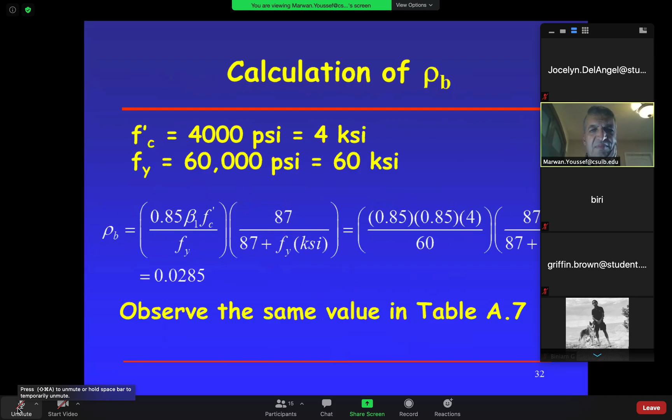We covered all that, and we just had two examples to finish so we can wrap up this chapter. So we did all these: 3.1 we did, 3.2 we did, so we're gonna do 3.3. Before I begin, any questions from last night's lecture? Any comments? All right.

So we're gonna do 3.3. It says determine the ACI design flexural strength, meaning the moment capacity of the beam. Exactly the same as 3.1, 3.2, but of course a different beam with different rebars.

So he's asking us to find the flexural strength. When it says design, that means MU or phi MN, same thing, the ultimate. So there's our section: B is 12, D is 15, H is 18, AS is 4.68.

So first thing we do is we check the steel percentage, rho, so we can compare it against rho minimum and rho maximum. Rho is defined as the area of steel divided by B times D. Meaning how much steel do I have with respect to the cross-section of the concrete? What is the ratio of the area of steel to the cross-section of the concrete?

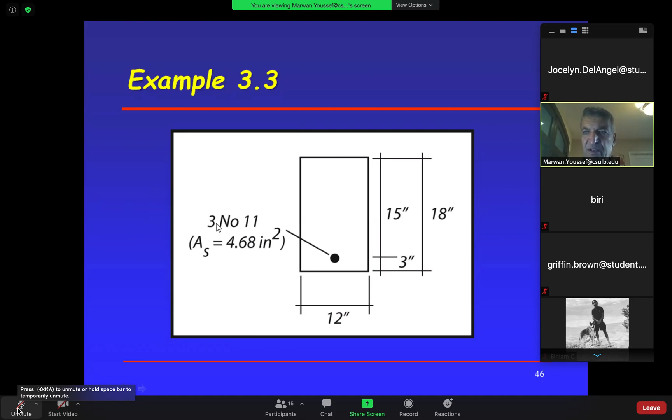Rho minimum, like we said last time, either check the equation or go to table A7 and you will find rho minimum. All you need to know is F prime C is 4,000, Fy is 60,000, okay? Then you can find rho minimum. In that table, you can find rho min comes out to be 0.003.

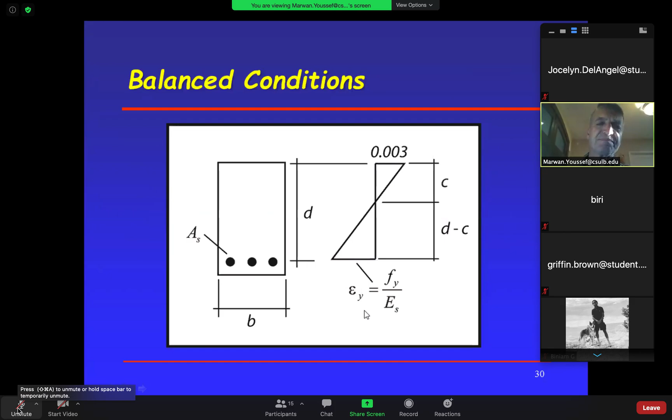All right, so rho minimum is this. Look at our rho, 0.02, rho minimum 0.003. So we meet the rho minimum, no problem.

And again, why does the code ask for rho minimum? That means I have minimum area of steel, because AS minimum is rho minimum times B times D. See right here, if you cross multiply, AS equals rho BD. So if I'm using rho minimum, that means I have AS minimum, which is rho minimum times B times D.

Why does the code ask for that? Just to make sure we have enough temperature and shrinkage steel so that the member is not going to crack, and that the member carries its own weight without cracking. Okay, that's what rho minimum is.

Rho maximum, we should be below rho max, right? So look at our rho, 0.02. Look at our rho max, 0.018. We exceeded rho max, see that? We exceeded rho max, so this should raise a flag. But from here, we cannot tell whether it's good or bad yet. You will see, but it should raise a flag.

So it says here, therefore, epsilon T, the strain in the steel, is less than 0.005. Remember that? Because we want that strain to be over 0.005, which means the steel is going to yield. We are less than rho minimum... maximum, but this one it's not. So we'll see what happens in a second.

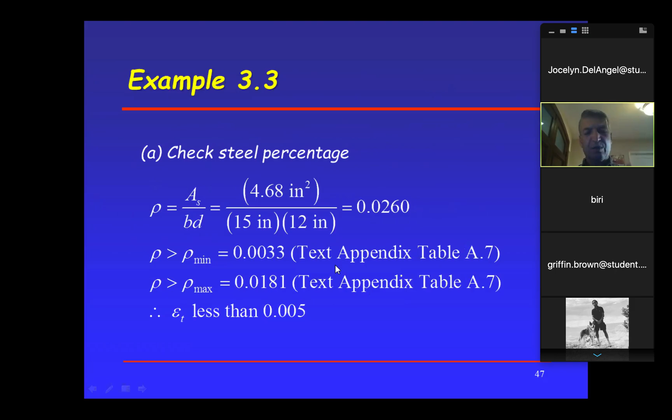We derived those, so now you just have to use it. From here, I know everything. I know D and C and C. C is 8.1. D, what is D? Look at the figure. D is 15 inches from the top to the center line of the bar. So then that epsilon T gives me 0.00256. Okay? So 0.00256, let's see where that puts us on the chart.

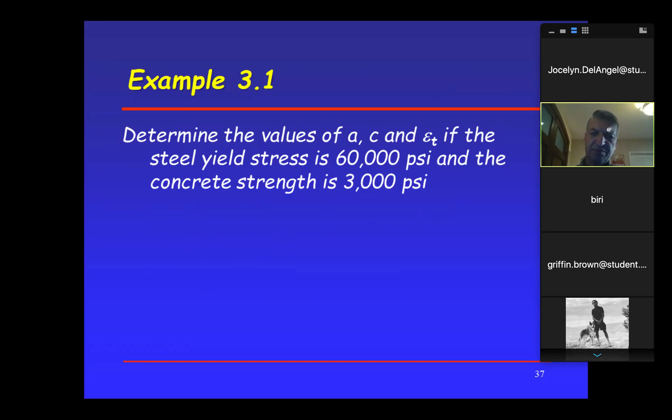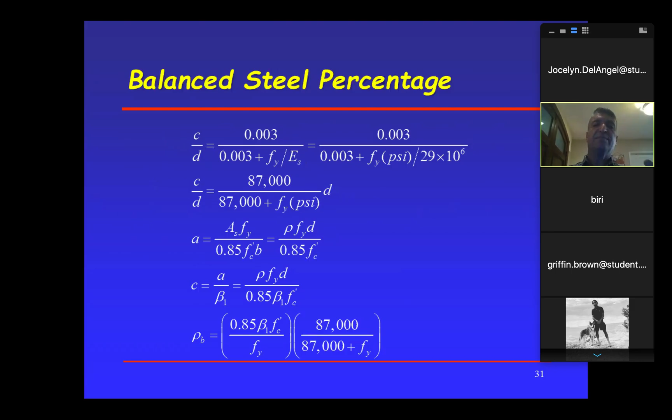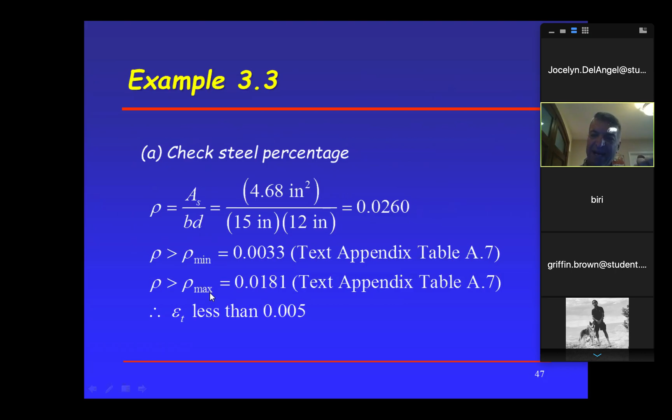You cannot use that. So somebody could say, then what? What happened? You have to change this section, you have to change the dimensions of it. Okay? Because look what happened - if you make it bigger, B is bigger and D is bigger, right? So look what happened to that. If you make B and D bigger, what happens to the rho? It goes down, it goes smaller. So then you're going to be less than rho max. So then when you calculate here, you might be below that number. So that means you have to refine your design to use this beam in your building. All right?

3.4. You notice every one of those examples is a different rho, different value to illustrate what you can and can't do in the table, in the graph. 3.4, same thing, design ACI, design flexure strength, 4,000, 60,000. The only thing is we have a different beam. See, B is 10, D is 15, H is 18, AS is 3. So what is the design moment capacity for this?

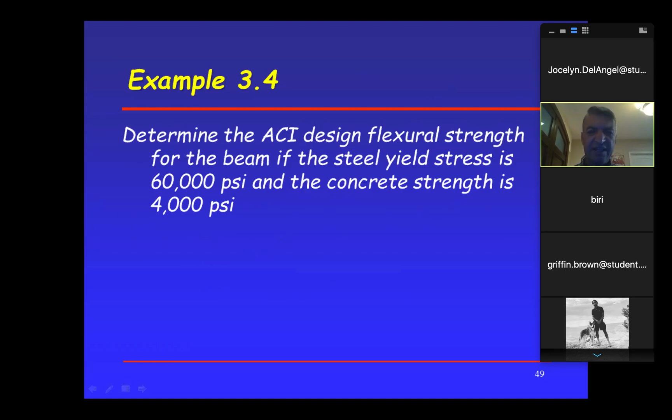Same thing, first we check the steel percentage, AS over BD. AS is 3 inches square, over B is 15... wait, B is 10 and D is 15, that gives 0.02. Rho minimum, again, 0.0033. Why? Because look, we're using the same F prime C and Fy, so that's not going to change. And most of the time, that's going to be the case. In real life, in the course, it's going to be the same, 0.0033 from this table.

Rho is what? Look at that. Rho max is 0.0181. This is larger. Again, it raises a flag. It's not necessarily that you cannot use it, but it raises a flag. In the last example, it raised the flag and we couldn't use the beam. In this example, it raised the flag too, but can we still use the beam? We'll see, we'll see in a second.

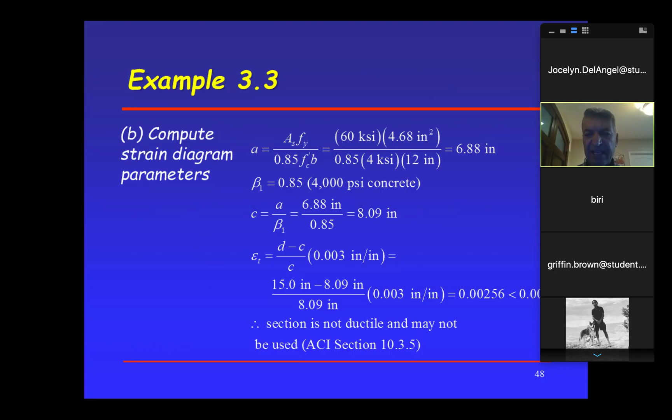Therefore, not tension controlled, that means it's not over 0.005, we're not going to be in that area. All right, so go through the same process. A equal to this, we go a little faster now, 5.29. Beta 1, again, 0.85 because for 4,000 PSI concrete. C equal A over beta 1. Epsilon T is that, you plug in the numbers, look what epsilon T is, 0.00423. See that? So let's go to the graph, 0.00423, that's the strain in the steel.

Look here, 0.00423, we're here. We're here. Can I use this beam?

Yes, it's between 004 and 005. The code said I can use that. The only thing is my phi is not 0.9.

I'm going to put 0.00423 somewhere here, go up, and then go horizontal, or put the epsilon T 0.00423 here and solve for phi. And that's what he's going to do. Look at this equation and remember that. He's going to use this equation to calculate phi.

Remember, all you have to do is epsilon T here. Look at the 250 and the 3 and this 0.65. This equation is different than that. See that? This is 150 over 3. This is 250, this is 0.75, this is 0.65. So this is the one we're going to use, right?

Because the other one is for spirals. That's not a spiral we have.

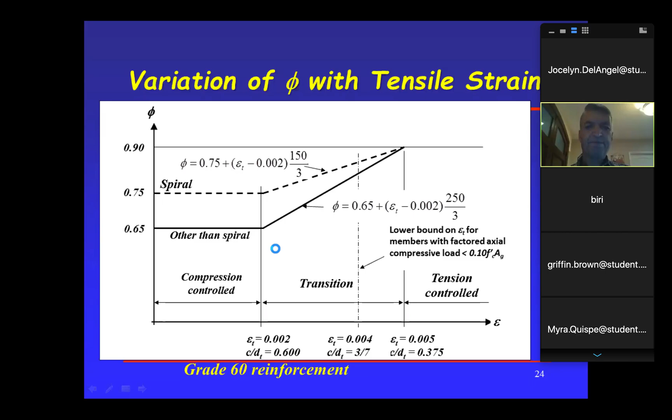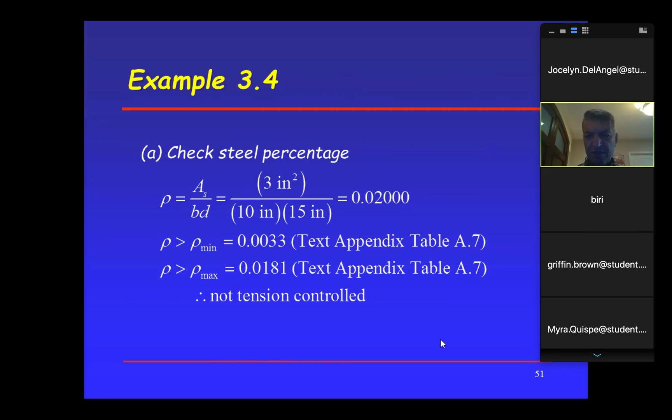All right, so 0.00423 between 0.004 and 0.005. Look at this, 0.00423 greater than 0.004, okay, and less than 0.005.

Therefore, the beam is in the transition zone between those two. It's okay to be in the transition zone. The only thing about the transition zone, we said the beam is not economical. It's not the best design you have. If you're designing from new, then you would go back and change the dimensions of the beam to make sure you're out of that zone. But if you're doing an analysis of an existing building, you cannot change the design.

So if you prove you're in that zone, you're okay. If somebody is asking you to prove that this beam is good, yeah, it's in the transition zone, it's okay, but you would not design it like that from scratch. You would change the design.

Professor? Yes. What would happen if you do a review, you're checking the beam and then it's not in that zone? Like what would you do? Or what would happen? That's a good question. Then that beam is not good.

It's not good. Then what you have to do, you have to look into retrofit. How do you retrofit that? To make it stronger. And there's many ways to do that.

One way, these days what they're doing is they're wrapping it up with carbon fiber sheets or e-glass sheets. I don't know if you know what that is, it's like a cloth made out of fiber, and what they do is they put resin on it like a glue, and they attach it to the sides of the beam, the bottom of the beam, and the other side, and that gives it more tensile moment capacity.

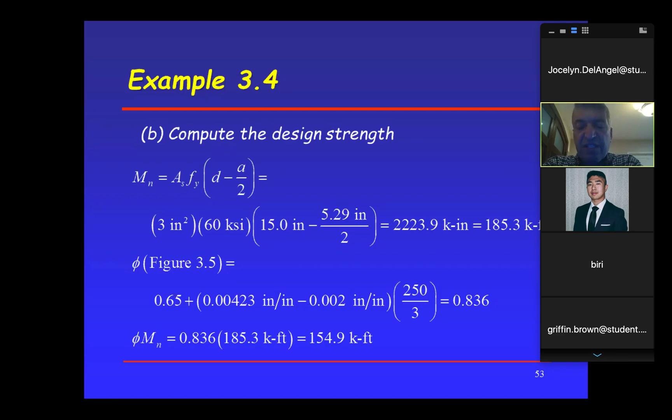I wanted to finish this because next week I'm going to start the beam design. We're going to start designing the beams. All these, as you can see, the examples, the beams are given. The dimensions are given, the steel is given. It doesn't talk anything about loads. Those are analysis problems, okay?

Next chapter, we're not going to be given these beams, the dimensions, not the steel. All they're going to give us is the loads. Remember, this is dimensions given, steel given, how much moment can it carry. In the design, they're going to give us the loads, dead load, live load. From those loads, we're going to calculate the moment, and then we're going to proportion a beam like this to carry that moment.

See that? That's going to be interesting. So that's going to be the design of beams. And then once we finish that, right after in the same chapter, we're gonna design the slab. We know how thick the beam and the slab needs to be roughly.

Next chapter, we're gonna finalize design on those, and then after that we go back to the project, and then you can design your beams and slabs and put the rebars in. See how we're tracking? We're doing it in a very systematic way, so we can follow up with the design project.

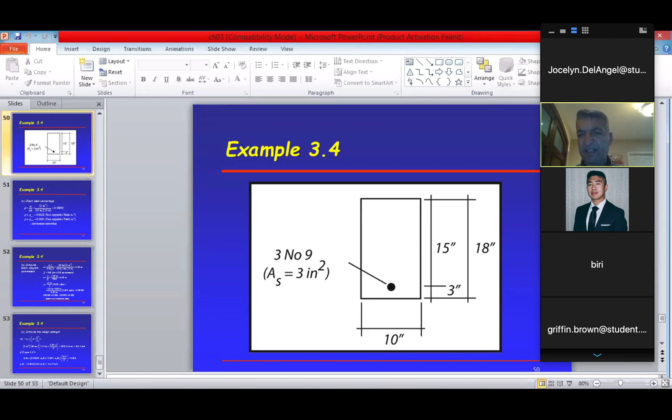So today, this one here is, we're gonna talk about as if we were in the lab, and if we were in the lab tonight, we would be mixing concrete. We would be mixing concrete and then put the concrete in the beam, in the form that we talked about last time, and then we put the concrete in the cylinders that we talked about. So that's what we're gonna do tonight, to cover those steps, and then I'll show you part of the presentation.

The concrete mix with a 4,000 PSI concrete strength. So on the bag, it says 4,000 PSI, because that's what we wanted. We wanted to buy that.

Follow the instructions given below to make your concrete mix. So how are we going to do that?

If we were in the lab, you would have this page with you and follow the instructions. It says after making the concrete mix, rinse off the mixer and any tools you have used, just to keep everything clean for the next class and next groups. Because if you don't wash the concrete off, it's going to get hard and you cannot wash it anymore - that's bad. Even these instructions are given on the job site.

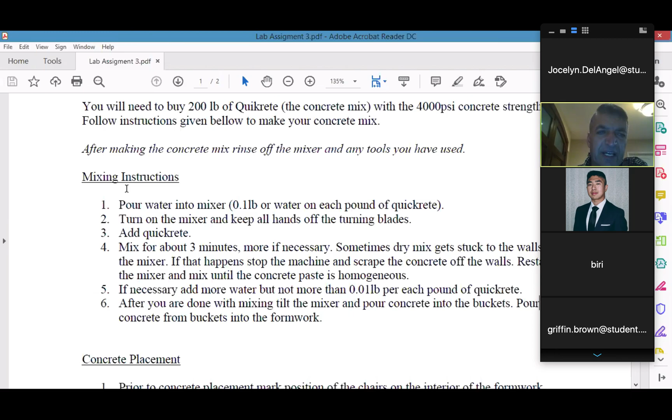So how are we going to mix? What are the mixing instructions? It says pour water into the mixer. You'll see the picture of it in a minute - it's a red mixer, I showed it to you at the beginning. And we're going to pour water in the mixer first.

How much water? It says use 0.1 pound of water to each pound of Quikrete. So 90 pounds of Quikrete is going to take 9 pounds of water. I remember we brought the scale from the materials lab, and the students measured 9 pounds of water and put it in the mixer. Turn on the mixer and keep all hands off the turning blades.

Safety - and then add Quikrete. You start slowly adding Quikrete mix into the mixer as it's mixing. This is a very sensitive operation. You have to be careful with it and make sure hands are off and all that.

You're going to let the mixer mix for about 3 minutes, and you will visually inspect the mix. If it needs a little bit more, you let it mix some more. Sometimes dry mix gets stuck to the walls of the mixer.

If that happens, stop the machine and scrape the concrete off the walls, restart the mixer, and mix until the concrete paste is homogeneous. That means the paste looks a little fluidy - you know how concrete looks like.

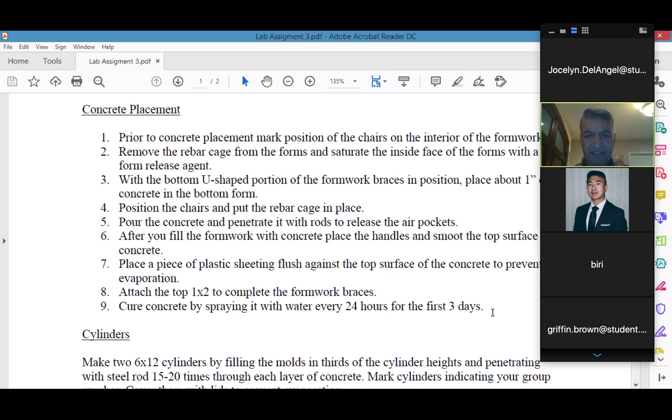With that done, you fill the cylinders. Remember, we have 2 cylinders. Make 2 6x12 cylinders by filling the molds in thirds: 1/3, 2/3, 3/3. As you're doing that, you're tapping it with the steel rod—you've done that in the materials lab also. Tap it 15 to 20 times, or as needed.

Mark the cylinders indicating your group. Mark on the outside which group number you are in, smooth the surface out, and then put the white cover on it. Then you set it next to your beam and mark your beam and all that.

Rinse all the tools off that you used so they can be used by the next group. So this is what we would have done tonight if we were in the lab.

We poured the concrete beam, covered it with plastic, took it outside in the parking lot, put it in the corner, and placed the 2 cylinders, smoothed the surface, covered them with the white lid, marked them, and put them outside. We do 2 cylinders because when we test them, if they're both good, we take the average; if one is bad, we at least still have 1 good one.

What is the reason for the cylinders? We want to determine the actual F prime C. The bag told us it's 4,000 PSI, but the actual F prime C is what you get tested in the lab—at what pressure it's going to break. That's your actual F prime C. We'll talk more about that.

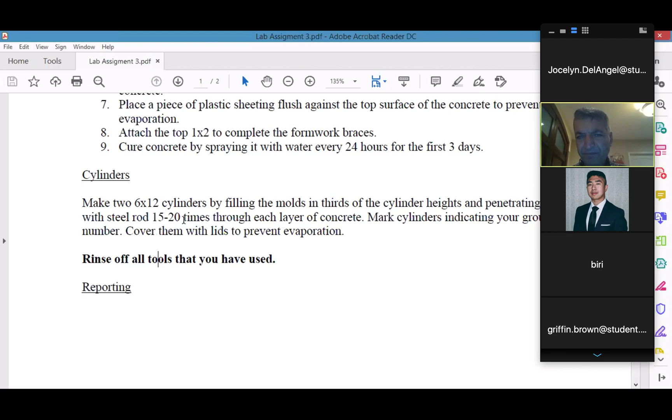All right, so we did that, and that's it for assignment number 3. Any questions on that?

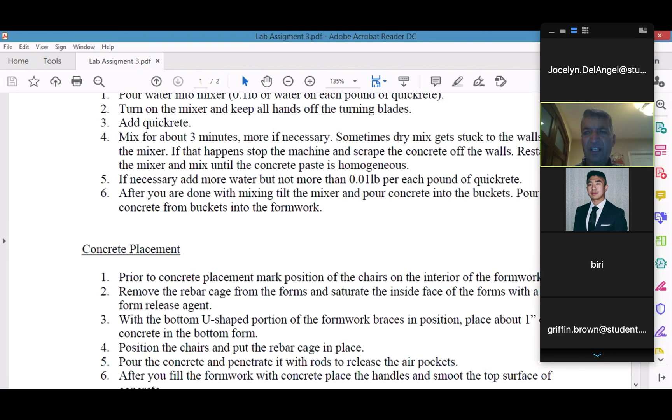So there's no action item for you to do at this time, except when you write your lab report, you're going to write about this. You can copy and paste it, I don't mind—you can use your own language, copy and paste, or modify it. But this has to be part of your lab.

Assuming you went to the lab: how did you mix the concrete? How did you place the concrete? How did you do your beam and your cylinders? Everything is written for you, so you're welcome to copy and paste it or do it in your own language.

Any questions on that? All right, so we're done with assignment number 3. Let's look at assignment number 4, and see what it says—that's the last assignment for the lab.

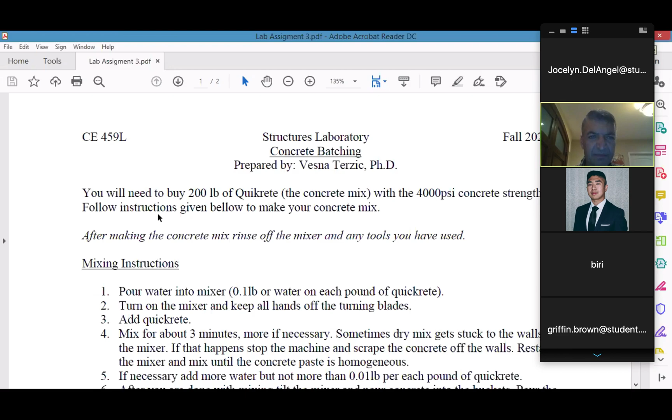Let's say now we poured the beam and the cylinders, and we waited 28 days minimum. Of course, we wouldn't have hit 28 days exactly, but after that, because of how the class is scheduled. After 28 days, we go to the lab and test the beams and the cylinders. That's what assignment number 4 is: testing of beams and cylinders.

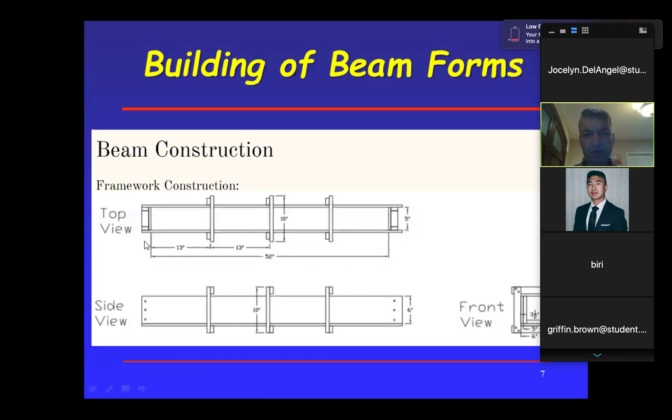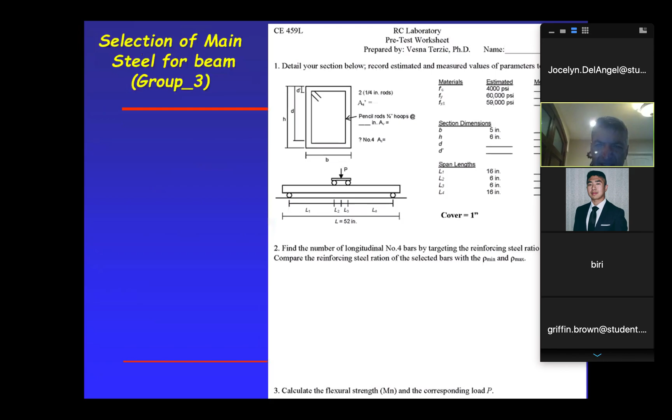We did all those. So these are the ones. Please make sure you are doing those as you go. Make sure you finish those and put them in your ring binder.

Remember, we did the pre-test calculation. You also should have done that in your group. Just as a reminder, we did this pre-test assuming F prime C is 4,000. We're going to do the same calculation at the end. Once we know our real F prime C when we crush those cylinders, it's going to be around maybe 3,000, 2,800. We'll do the same calculation with that different F prime C, and we'll call that the post-test calculations, okay?

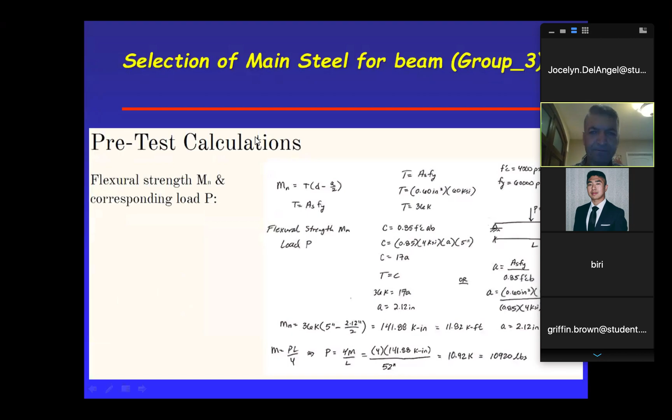So we did all those. We didn't do the shear - we skipped this because, like I said, we have to wait. And then we calculated the P's and all that. All right, so what I want to start with is here tonight.

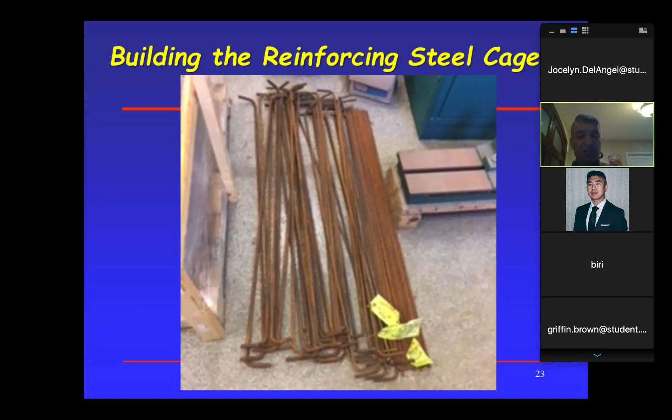We always had this here because I wanted to brace the sides so they don't move, because the pressure of the concrete is a lot. I didn't want to risk losing the form, because think about this: the form is attached to the bottom only with some small screws, and look how thick the wood is. It's not that strong.

And then just another comment here - look at these, we call those stirrups. They are deformed bars. Usually even in real life, those stirrups are made out of smooth bars. But I remember in this case the company didn't have any smooth bars, so they gave us these deformed ones. They donated the material to us, so we couldn't be too picky about that. So that's the cage.

And then look at these thin wires. That's what you had to tie the stirrups to these bars using these wires right here. So this is a blown up picture of it. Again, when we calculate how many stirrups we need, you will see everybody is going to come up with an answer. We're going to need one every 2.5 inches. A lot of them. You will see why later on when we cover that chapter.

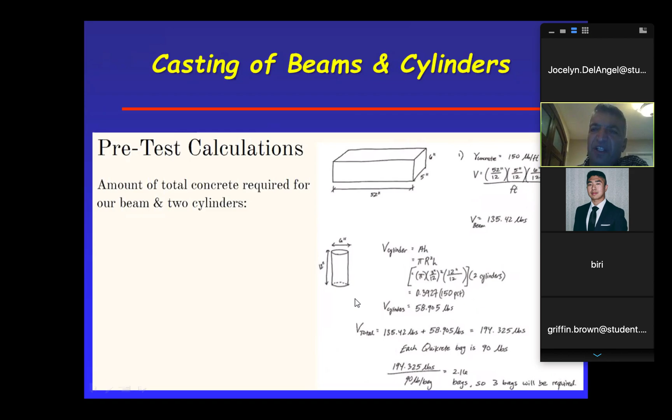So remember this, we calculated how much concrete you need, and based on this, you determine how many bags we need. We already did that.

So you remember we put 9 pounds of water, then we start adding the bag of concrete. Of course, one guy couldn't carry the bag, so 2 or 3 guys had to carry it and slowly dump it in a little bit at a time while the mixer was going. Honestly, it doesn't make sense. To be safe, I would put the bag in, then add the water to it. It's not going to make a big difference, okay?

So, of course, in real life, we don't use these mixers anymore. It's already mixed that goes to the job site. They use these mixers when they're doing masonry work, because they don't need a lot of concrete for that. Like when they do the masonry work, they mix sand and cement, and they usually mix it with that.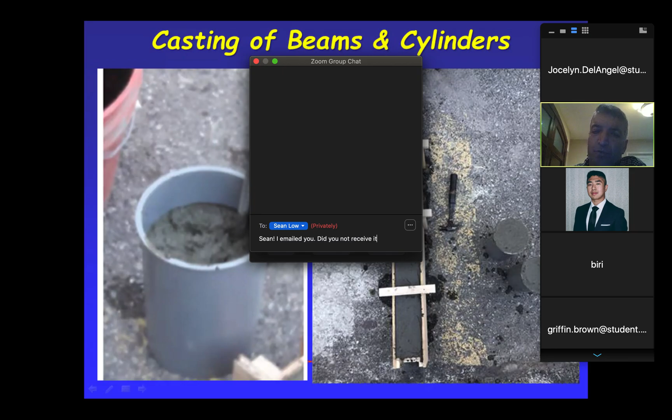All right, so this is what that is. Smooth the top, cover it with a piece of plastic, and move it out to the parking lot. And then mark the cylinders and put those next to yours, and then that's your beam and cylinders, and they would have to cure for 28 days.

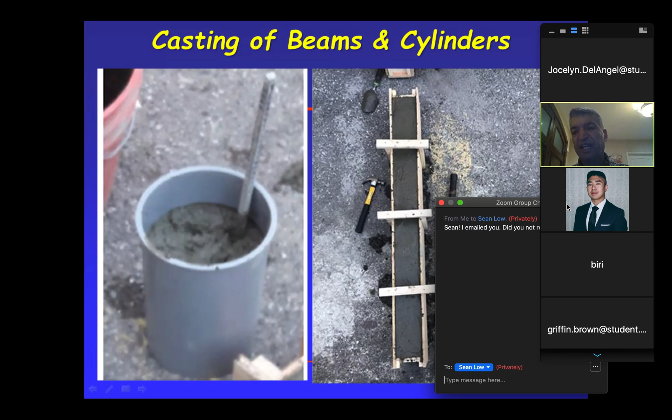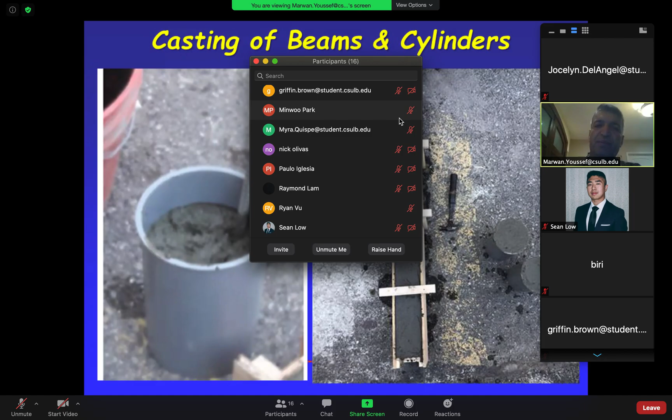Any questions so far? So I hope you're getting the feeling as if you're in the lab. I know it's not exactly the same, but I didn't want you to miss anything that was done there. And then the video also discusses the same stuff, and you can also hear it one more time. Please do that.

Quick question, Professor. Are those for the mixing machine that you just showed a couple slides back? Yeah, the mixer, yes. Is this the same as the one that gets carried around by big trucks? No, this is on a smaller scale. They come in different sizes.

Same idea, but when you have the truck, you're not talking about the ready mix truck that does this, right? Yeah, I'm talking about that one. That ready mix truck, the concrete is already mixed inside.

All the concrete truck does is they have a chute, they attach a chute to the end. They have two ways: if you're pouring a footing below ground, the chute is put on and by gravity the concrete flows down. But if you are pouring a slab, the ready mix truck dumps into a big pump, and then the pump pumps it up to that. So if gravity doesn't do it, you have to pump it.

Does that make sense? Yeah. So you will never see this on a ready mix truck. You will see this on a contractor's truck, on the back of a contractor's truck who is going to do maybe a small job, and he only needs to mix 1 or 2 bags. Got it. But if you need a lot, you usually get ready mix. Professor, any other questions?

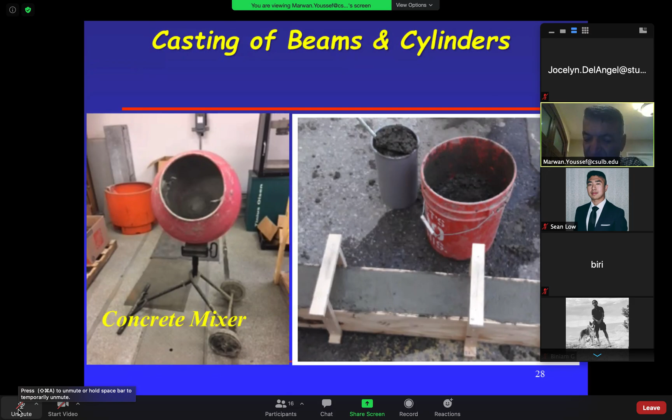And that's why there's a lot of specifications, a lot of requirements, and that's why we have inspectors on the job. The inspectors make sure what delivers to the job is what the engineer specified. I see, that makes sense. Thank you. You're welcome. Any other question?

All right, so continue. Then this is what we said we do. And then now, after 28 days, what happened? We stuff into the machine to break them. This is the machine we said we're going to place the beam on to break it.

And you'll see a better picture. This jack, hydraulic jack, is connected to that machine, and it's pumped by hand. See that lever arm? One student would pump that, one student would read the gauge here. The gauge gives you a PSI reading, that's a pressure. You will see in a little bit when. Let me jump to that, I'll come back here.

This is how we equip the beam. We also attach this gauge to the center of the beam. Its function is, as the beam deflects under the load, this gauge reads the amount of deflection. So one student would man this, reading this dial, one student is pumping by hand, and the other student is reading the pressure gauge. That's how it was done as a team.

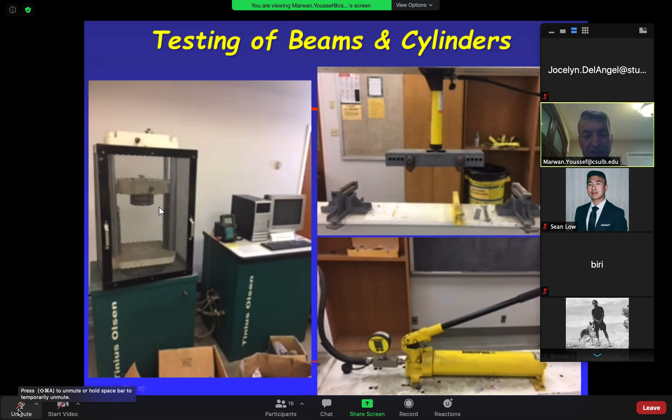So this is the machine, and this is what you've seen in the materials lab where you put the cylinder and crush it. This machine is connected to this computer, which displays a stress strain curve for you. You've seen that. So again, this is blown up. There's the machine, there's this.

This machine pumps pressure into this jack that pushes down on the beam. That pressure is going to be in PSI. Remember when we calculated the force P it takes to crush the beam? Well, this is a PSI, we have to convert that into a force. We'll talk about that later in the presentation, I'll show you how to do that. So this is the setup here.

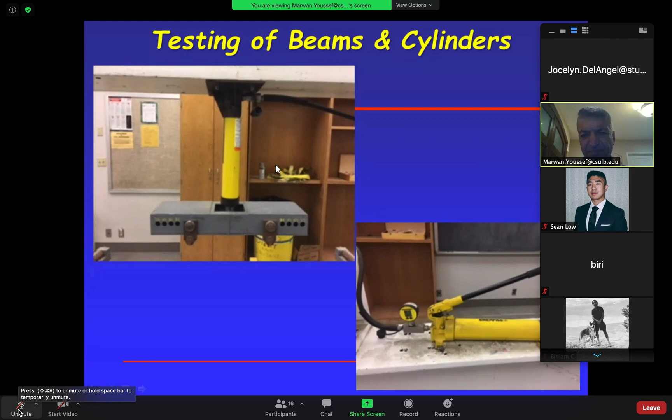This is how you position the beam, ready for testing. You set it up here, making sure this distance equals that, so the beam is centered. Look at the center, we put a line in the center of the machine, making sure it's centered with the beam.

We measure the beam, divide it by half, and draw a line. You can't see it here, but we make sure the two lines line up, so the load is in the center of the beam. Why is that? So the equation moment equals PL over 4 applies, because that's the formula when the force is in the center of the beam. So you try to be as accurate as possible.

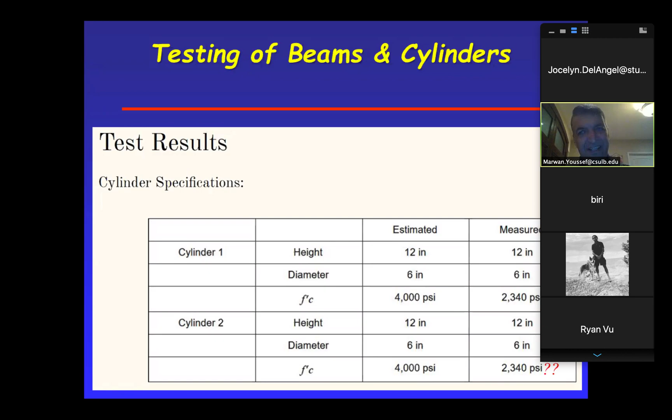That's a big liability. Another good example: on a freeway project, a lot of those bridges are supported by one big column in the middle of the bridge. What do you think the contractors start doing? Clearing and grubbing and digging for footings. So the surveyor tells them this is where the column is and puts a stake there. The contractor goes ahead and does this—they put the column before they form the bridge, way before. What happens if the location of that column is wrong? Somebody is going to be in trouble. This is why I tell you we are in a high liability profession. You have to be very careful. Making mistakes could kill people, or making mistakes could cost millions of dollars.

That's why we have to be careful as engineers and take everything serious out there. All right, so that's enough for that.

Like I said, these two numbers should be different. If they are close, let's say 2340, 2550, you take the average of the two. If this is 2340 and this is 1500, this is bad—so you throw that out and just use the close one.

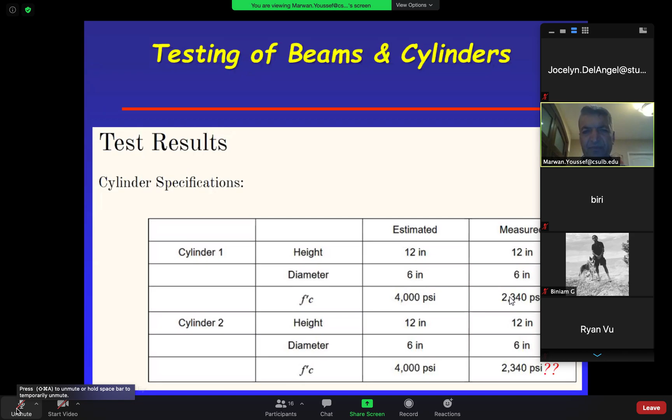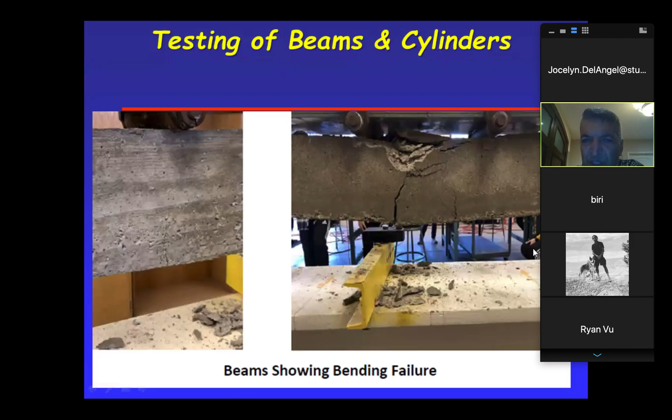This beam doesn't have these stirrups in it. One group didn't just have 4 bars, and we put one stirrup at the beginning, one at the end, just to hold it, but we didn't put any in the middle. Why? Because we wanted the beam to fail in shear.

And what is shear? Look at my hands. Shear is this. Bending is that, this is bending. Shear is this. One way to illustrate shear is like the bolts on my tires were sheared off, meaning broke like this, sheared off.

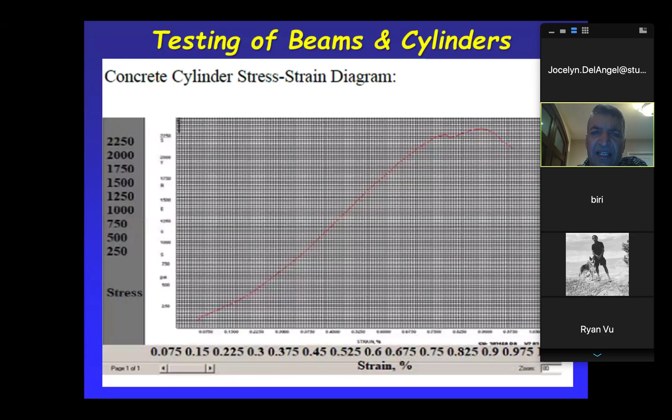And then what about the force? How did we get the force? Remember, the machine gave us a pressure, PSI, but the manufacturer of the machine said in order to convert that pressure to a force, because remember, pressure equals force over area, right? Pressure equals force over area, so force equals pressure times area. So the manufacturer said, take the pressure you read and multiply it by pi, 3.14.

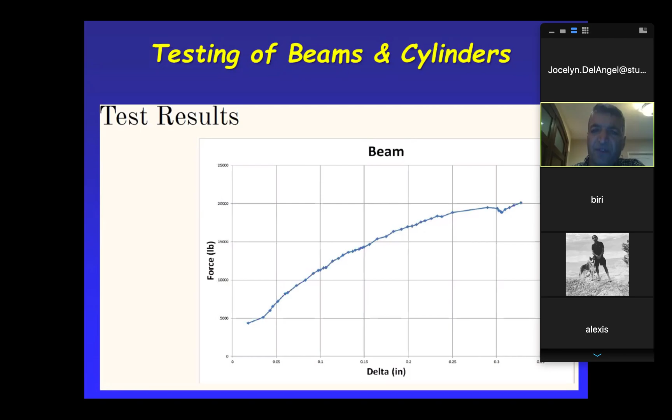All right, and then, like I mentioned, this is mine, so I can share that with you, but the copyrighted ones, unfortunately, I cannot. So there you go.

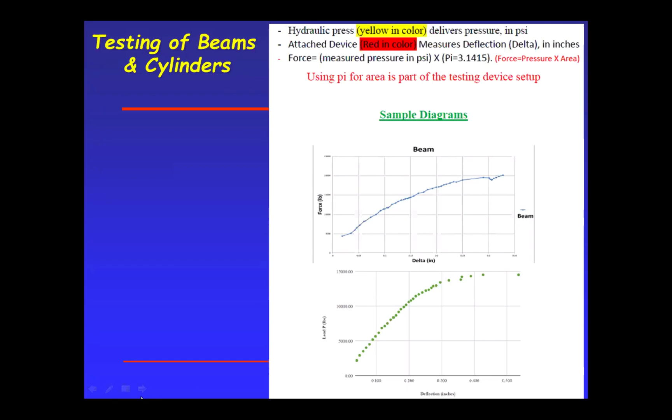So here you go, hydraulic press, yellow in color. Remember, we saw that press machine. What happened to my picture here? Okay, sorry, I don't want you to go to sleep. All right, so the yellow machine is the hydraulic press, delivers pressure in PSI, I mentioned that.

The attached device, red in color, that's that deflection gauge, measures deflection delta in inches. How are we going to get the force on the graph? Force equals measured pressure in PSI times pi, equal 3.1415. Force equals pressure times area.

See how much we're using this formula, guys? This comes from the deformable body class, or strength of materials. As simple as this formula is, it gets used all the time.

It says using pi for area is part of the testing device setup. The manufacturer told us that. So as the students, remember I said one student was pumping, another student was reading the pressure.

Another one was reading the deflection, and then another student was, as the deflection is read, had a computer ready. He or she entered it into an Excel sheet with a formula already that would convert the pressure into a force, very easy of course, and that's how they did that. Or you can just write them down and then do it later, either way, no problem. But this is the force deflection curve of the beam.

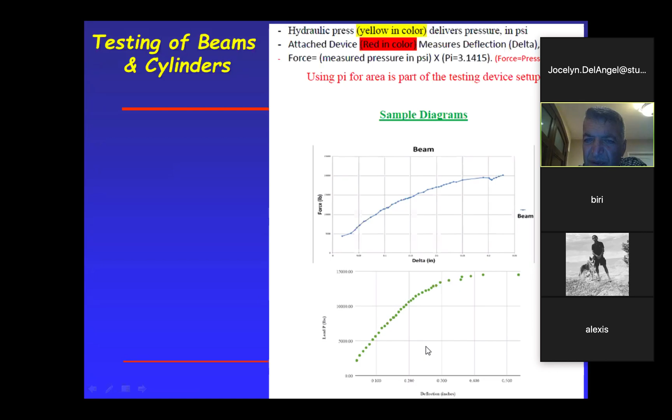Okay, this is actual data from one of the tests we did. So for your lab, I'm going to provide this for you. I'm going to provide maybe the delta and then the pressure as if you read it, and then maybe ask you to calculate the force and then plot the graphs. Okay, so we'll do that.

And look how many points we have. Delta, pressure, delta, pressure, delta, pressure, continuing, this is the test ongoing, delta pressure until the beam broke. So the beam broke at a deflection of 0.328 inches, and the maximum pressure was 6,400 psi. See that? Starting from there to there. So this is good test data that we did in the lab, one of my labs, we did that.

And then after that, what will happen? We're going to do the post-test calculation. We already talked about that. Same calculation you did in pre-test, but now you're going to use F prime C 2340 in this case instead of 4000. Okay? And then of course, that's what this says.

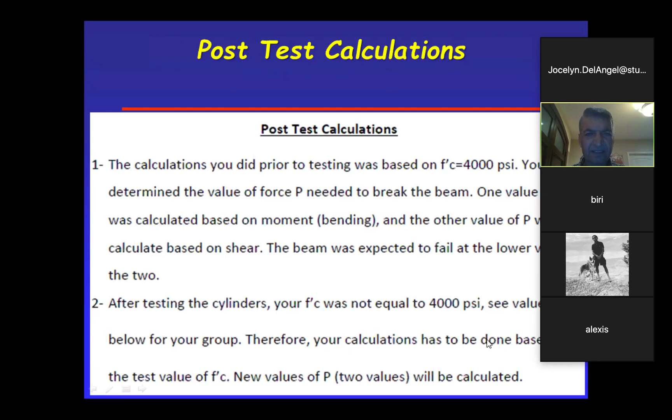So you do that, and again it's shown to you in the presentation I showed you before for the lab, you also have that. So there you go, the F prime C was estimated at 4,000. We measured 2340. FY60... I don't know why we say 66,000, because we did not measure the steel in the lab, unless the company told us when we got our steel from them that FY is 66,000, but it's not important, either way it's fine.

And then this FYT is the yield stress for the stirrups. It's 59,000. So no big deal, just use the numbers.

And then here, this is what I'm going to assign to group 1, group 2, group 3. I'm going to give you some numbers similar to those. So this is what you would have gotten in the lab if you tested your cylinders. See that? I changed some of these numbers just to make them different, but I remember nobody got anything above 3,000. So you will get these from me. This is like Thursday class, Friday class, Saturday class, something like that.

So we're going to redo the calculation for your group based on these F prime C's, which is easy, you already done that. Then here you go, this is the post calculation. And again here, they're shown here also, and they're shown also in the other presentation. So everything is the same.

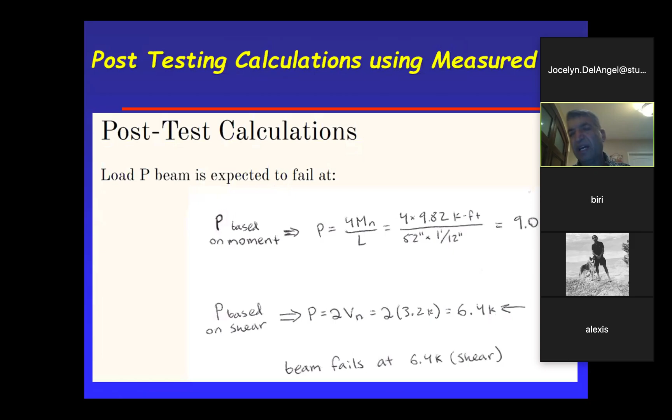Calculated beam was supposed to have a ductile failure, moment failure, 10.9 kips. See, this is the P we would have needed to break the beam using 4,000 PSI. How much did we end up with? 9.06. See that? From 10.9, almost 11, to 9, because of the difference in strength.

And then the shear failure, I said we skipped that. Actual beam had a brittle shear failure. Actual design had a very weak concrete, 2340 versus 4,000. See that? And then using measured values, found that our beam would have a brittle failure due to weak concrete, moment 9.06 versus 10.9, and then the shear failure is 6.4.

So based on that, what do you think the beam was going to fail at, 6.4 or 9.06? It's going to fail here because this force is going to be delivered before that. So the beam would fail in shear before we even see that. And that was that beam I showed you where shear failure was happening, so that's that one, okay?

But your group could be different based on the F prime C, and then you can calculate those numbers, and then you can make your own conclusion. So everybody will have a different conclusion there. Okay, and that's it for that.

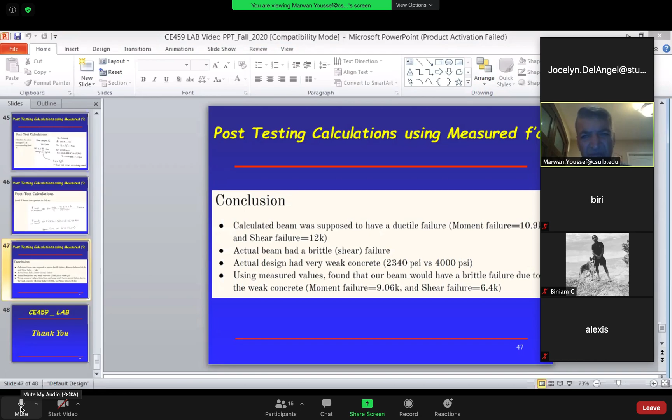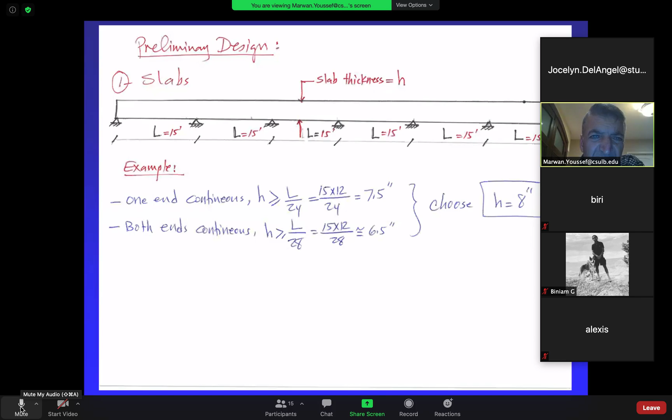Okay, can you see it? Yes, Professor. If you go to the class project, go down to the beam slab calculations. Okay, keep going. Good, let's do that. These ones? Okay, yeah, so that's where we get it. So I understand that, go to the next slide.

Okay, this one is where we get the weight of the slab, the dead load and the live load of the slab onto the beam. But what is the one after that one?

This one? Yes, okay. This one is we are getting the weight of the slab, how should I say this. Okay, this is the slab itself, sitting on the supports, right? So this is the slab itself. There's the live load and there's the dead load of the slab.

So we get the loads of that. From this slab, we go ahead and take the loads to the beams. You know what I'm saying? So that WU from that other slide would be added to this WU?

Later on, you mean? When we start calculating the full load on the beam. Okay, let me see. So this WU is what the slab is, and then this is the... actually no. This WU in the slab is already here, is already in the beam. See that?

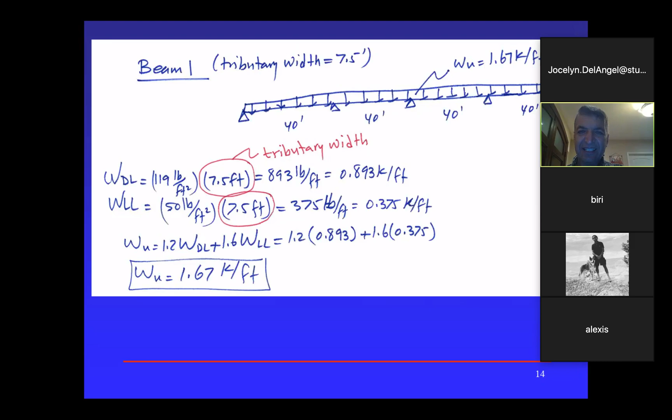Okay, now look at the slab here. This slab, before the force is gonna get to the beam to carry it. Before the force load is gonna get to the beam, here we're assuming that the load is getting to the beam, and we're gonna design that. Okay, but before the load gets to the beam, the load is here between the supports.

So the slab has to carry that. Does that make sense? Oh. So I have to know these loads, and then what kind of rebars I'm gonna put between these supports to get there. Okay, so that's the idea of that. I see, wow, okay. Yeah, good questions though, very good. But trust me, it's gonna all be clear at the end.

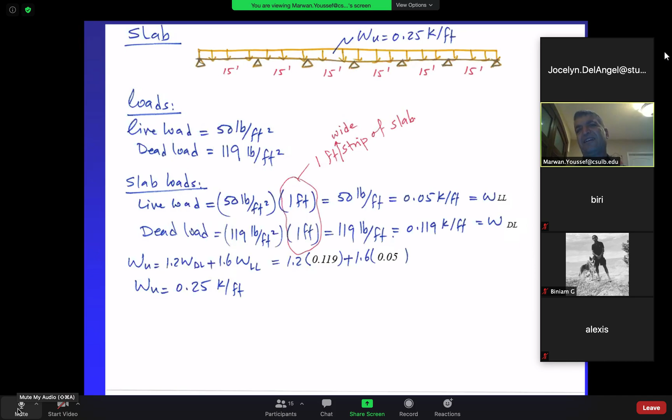Don't worry, all right. Thank you, Professor. All right, you're welcome, good job. Good questions though. I do have a question, Professor.

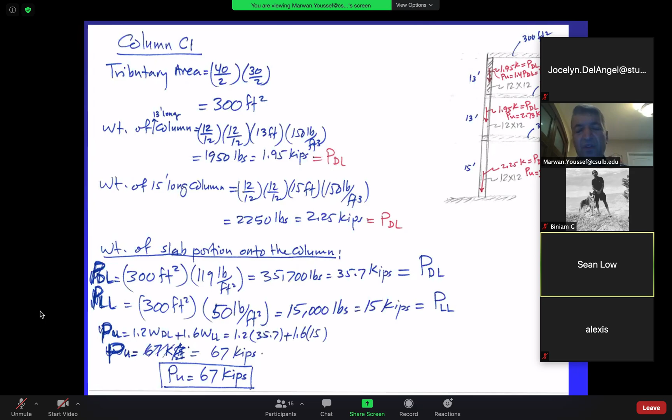You may just switch back. Let me switch back to that presentation. One second.

Let me switch back to the lab. Class, there you go. Can you see my lab now? Yes, sir, I can see it.

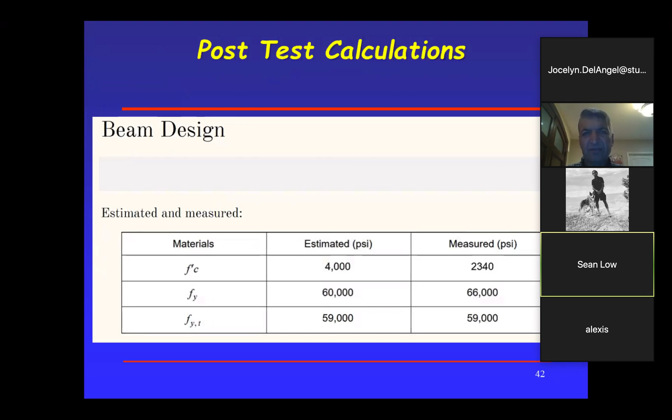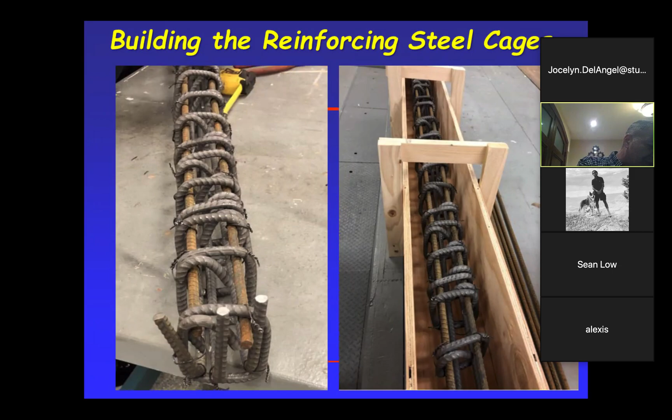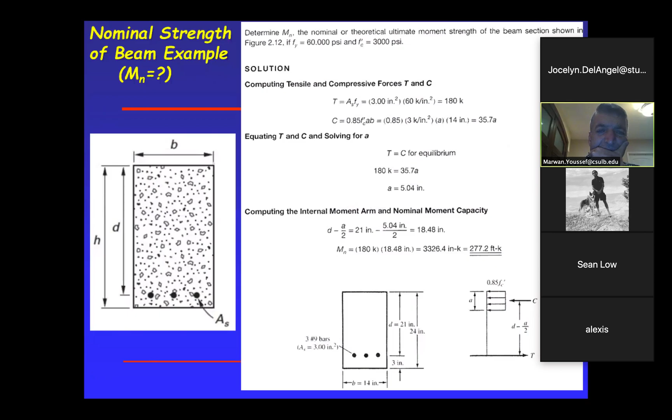Okay, let's go back to the beginning. We did that one last week. Then we have to do this one where you're going to give us the values this week, right? Yes, I'm going to give you the values this week, so that this is what you get out of the lab. So this is what you were talking about, Dr. Terzig? Okay, so that one right there. Yeah, so those ones, right? Okay, so that one's we have to do, right? So we have just that one this week.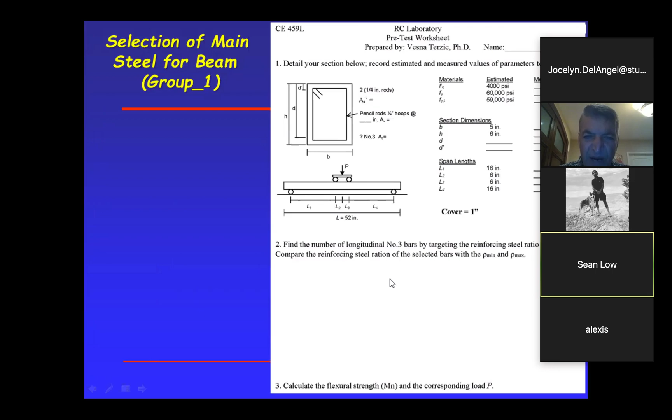You should have already done that. Well, no, I just want to confirm. So this one, yeah, I know. No problem, this is like we said, you would do this. One second. This one, based on F prime C 4000. Yes, and you're going to find the number of bars you need, and what is the value of P you need. And we said skip the shear here until later, right? Yeah, so that's the one.

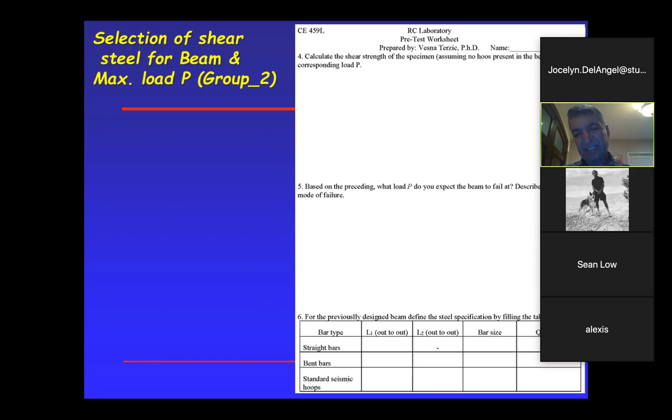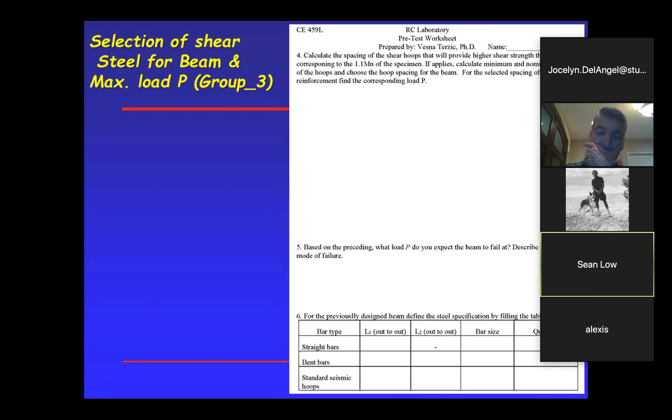And now we're going to do the post test, when we determine F prime C is not 4,000. And that one is shown in the—anything on these pages before I flip? Not at the moment, sir. Okay, so remember, these are the pre-test calculations. We did that, F prime C 4,000, and then you did all that, and then we discussed all this.

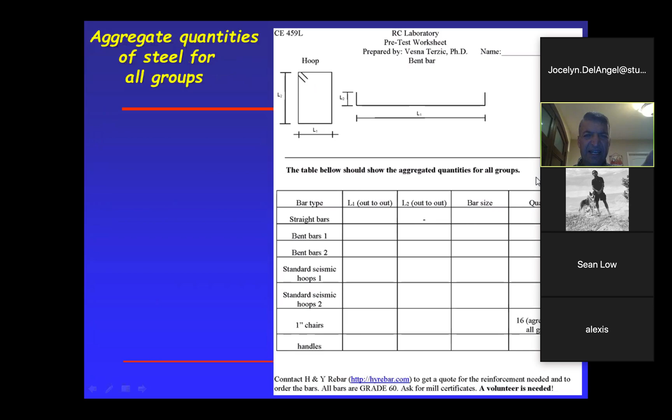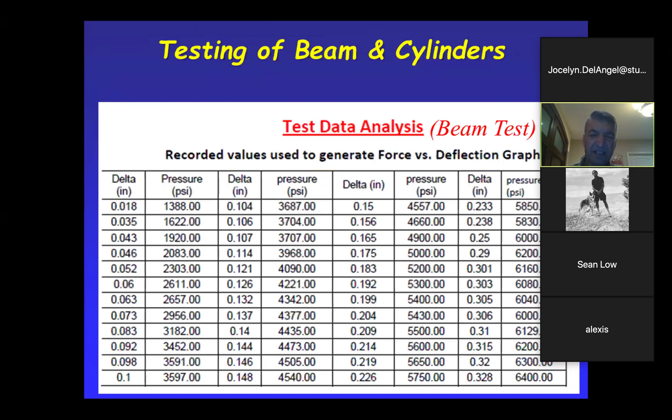So let's go forward. When we find F prime C, then we're going to do the post. I'm going to give you these results, and you're going to do the post-test calculations, which is here. See, post, and then the F prime C is 2340. So you will do that. So you need from me as a group, what is this F prime C value? Okay, so I will definitely do that for you within the week, next week, or this weekend if I can.

Is there any question? Any other question from anybody? All right, if not, we're done, but let me take attendance, please, quickly.

Let me see what happened to it now. Okay, let's see. I'm going to call names here. Let's say Adis—Adis, are you there? Okay. Let's see, Park—here, Minwoo Park, you there? Yes, here. Okay, Alexis—I'm here. Okay, Arpa—here. Okay, Binyam—I'm here. Okay, Biri—here. Okay, sorry if I mispronounced somebody's name. Carlos—here. Griffin Brown—here.

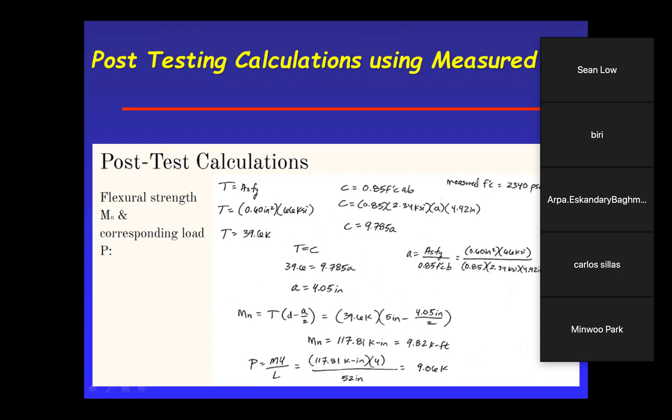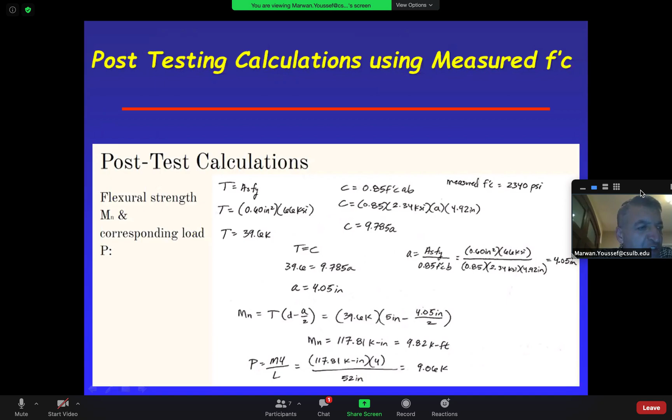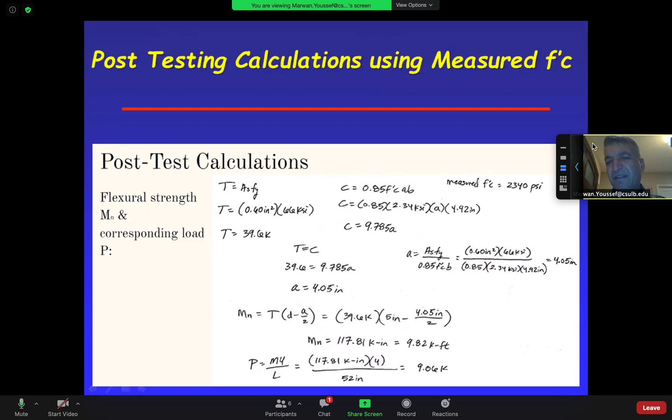I am very busy, as you can see, but I would love to do that. I will see if any opportunity jumps, I will let you guys know. Maybe we can do a field trip or something. Yeah, that would be really cool, Professor. But I am very, very, very busy—you won't believe how busy I am. But I will keep that in mind, and I appreciate the request. If I do have an opportunity, I will let you guys know. Okay, thank you, Professor, appreciate it. You're welcome, anytime. Have a nice weekend, everyone. You do too, bye.